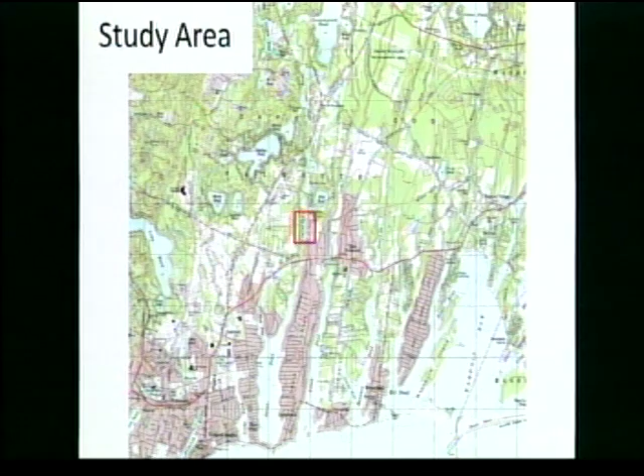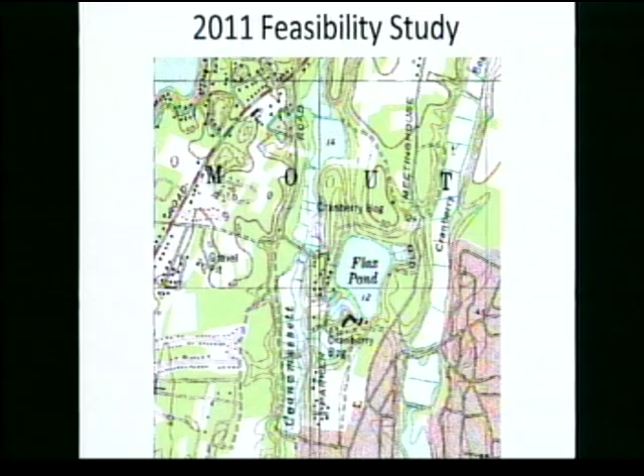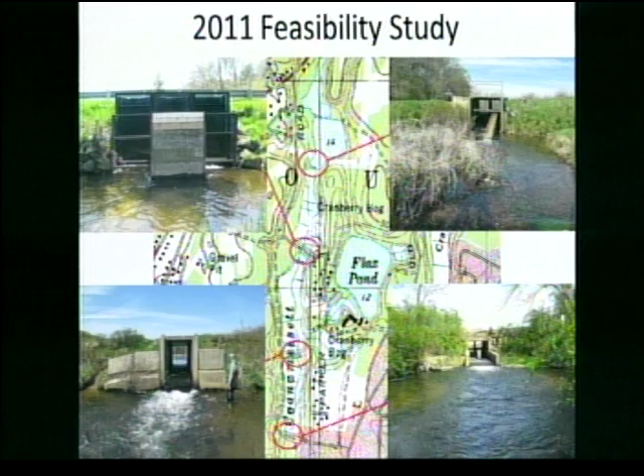In 2011, we worked on a feasibility study for the lower portions of the Coonamessett River, a fish passage feasibility study. This involved looking at four fish passage barriers, including Lower Dam down here, and a berm between Lower Dam and Lower Bog and Middle Bog, the culvert crossings at John Parker Road, and the dam at Pond 14. So we evaluated various options for getting fish around these barriers a little bit better than they're able to get by right now.

Following that study, the town proceeded to look for funding opportunities to further develop designs and, beyond that, construction. That flowed into this contract and project of developing the preliminary designs and final designs later on for the lower bog restoration and lower dam removal.

On this image, folks can see the Coonamessett River flowing downstream, and we've got Lower Dam, which is an earthen dam with granite blocks and some concrete. John Parker Road is along the side here, and this is Middle Bog flowing into Lower Bog.

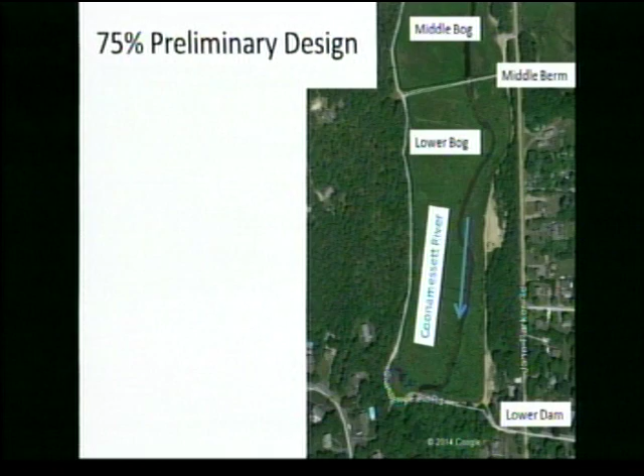The goals of this project were to remove a fish passage barrier, improve both the aquatic and terrestrial habitat on either side of the river, and provide a project that requires minimal long-term maintenance. We want this to be used by the public, maintain the recreational opportunities and the paths around the perimeter, but not require a lot of maintenance to keep up the restoration.

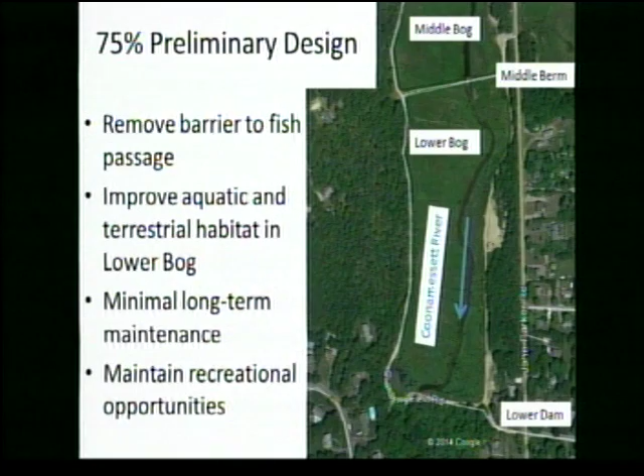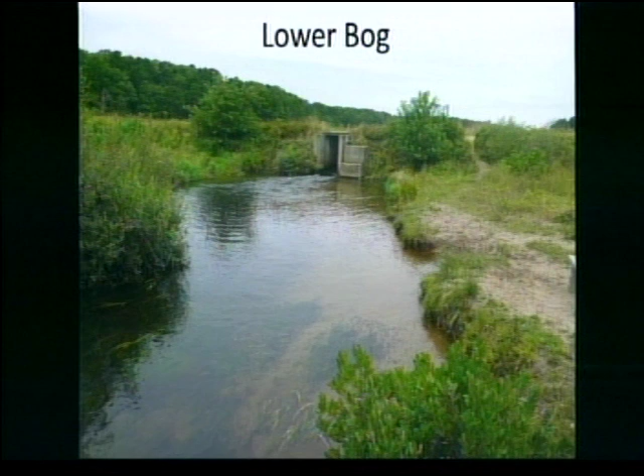As you can see, this bog has not been farmed for a number of years, so there's vegetation growing up naturally out there. I believe there's been some issues with invasive willow plants, so those have been cut back over time as well, and it's still a management concern on the site. There are a number of good native species out there, but also a number of invasive plants.

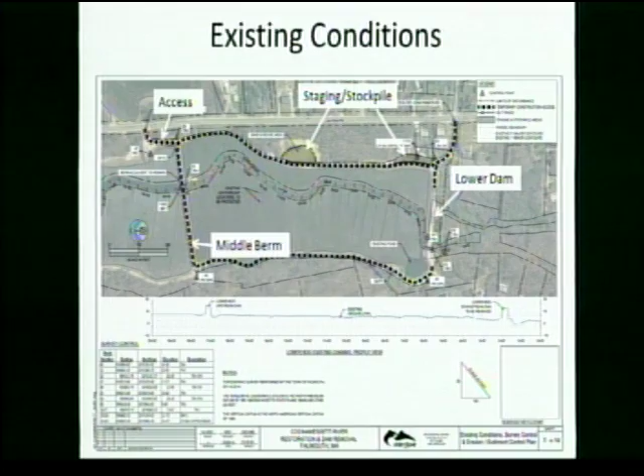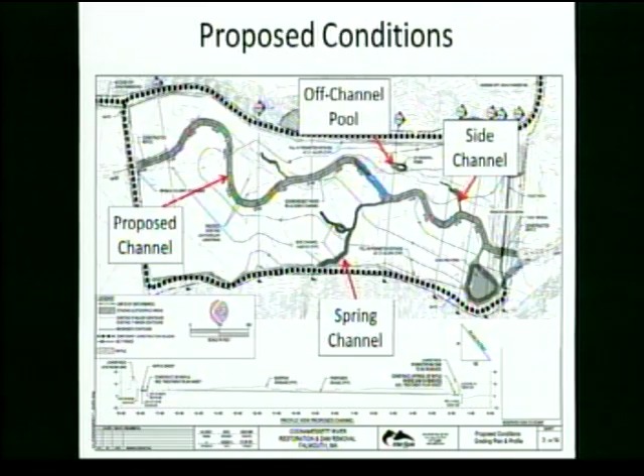The pool, the off-channel pool or open water pool in the southwest corner, will be deepened to try to prevent some of that aquatic vegetation from growing, and to access some of the cold water seeping in from the bottom.

So along these outer bends, each of these outer meander bends will have deeper scour holes created naturally because the wood is there creating turbulence, but also we'll build that in upon initial construction. We've got wood along the outer bends, and we also have wood at the upstream portion of where the existing channel will be cut off. This is important so that water flow doesn't retake the existing channel and basically go back to what it is right now.

There'll be wood placed depending on how much wood we can get, depending on funding. Wood will be placed elsewhere on the floodplains and some of these side channel areas, likely putting some wood in this pool for habitat as well.

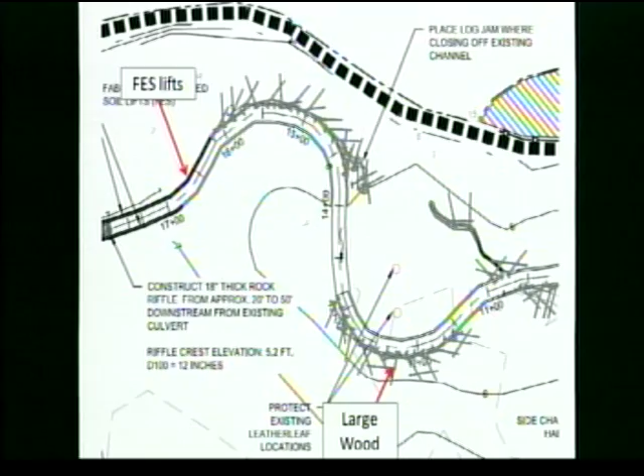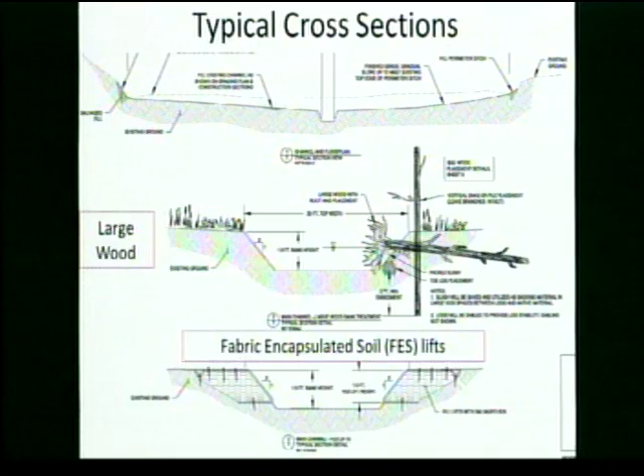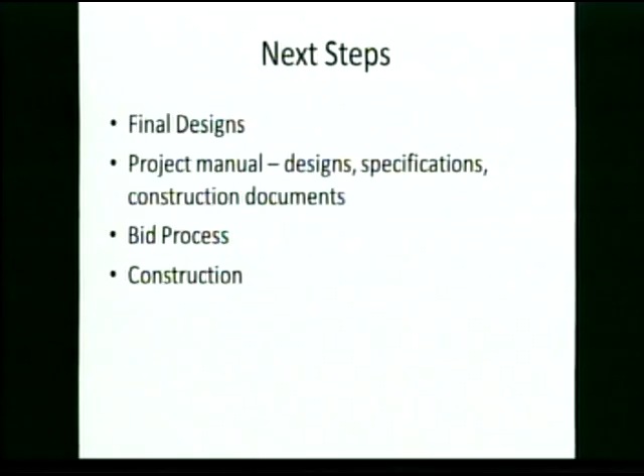Once we get through the permits, we will finalize the design plans, incorporating any comments and feedback received from the regulatory agencies, and develop a project manual for the contractors. This is essentially their contract to go out and build the project, all the technical specifications, the forms to sign, all of that. Then we go through a bid process where we get contractors to bid on the project, have site visits, and select our contractor, and then move into construction.

So it's getting to this stage at the preliminary design level is exciting, but there's still a little ways to go to get to the end here. And I'll take questions. Thank you.

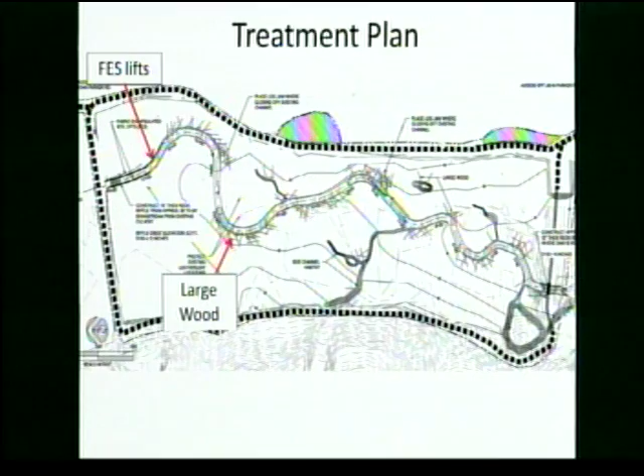It's a good point, though - we'll certainly see fish hanging out at that pool, and we might consider getting a couple of logs in there to provide some cover while they're hanging out. For this project we can't do anything about the system upstream yet, but that's a possibility for the next phase, looking beyond this lower bog. Let's see how this looks and performs, then think about modifying the culvert for easier passage, and depending on how things develop in the middle bog, go from there. But right now we're focusing on this lower bog area.

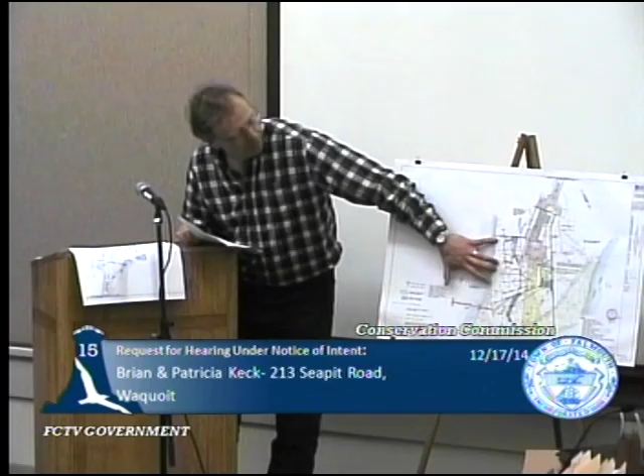And a lot of the Childs River area has a steeper bank down near the water, and then it's flatter than 10%. Then it picks up a little bit again right along the house. So we call this a secondary coastal bank through here.

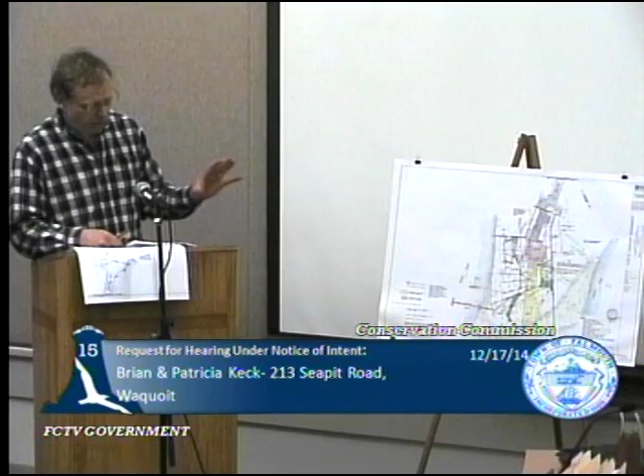This site has a house which was built in 2006 under a Notice of Intent, along with a septic system and the driveway. Those utilities had a fairly tight limit of work surrounding the house when it was put in. There's also a pier which was also built under a separate Notice of Intent, also in 2006.

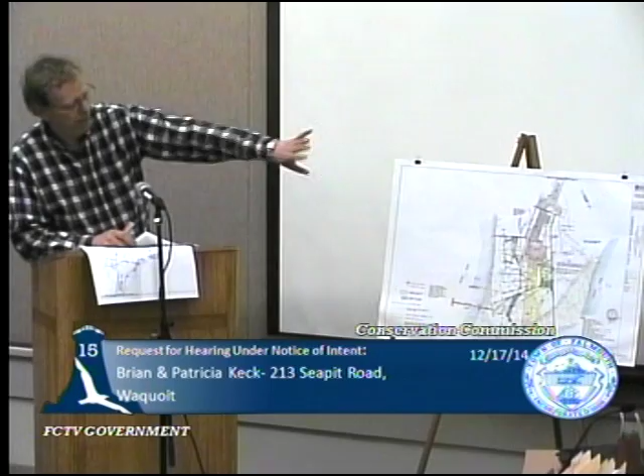Some of the area off to the side, this green area with lawn, is a remnant from when this was all one larger parcel of land which goes with the house up the side there, and that lawn is part of their lawn, which the lot line crosses. There's also an area underneath the trees as you go down that has a mix of native grass.

Amy can explain more what that grass is. Something crinkly, was it? I can't remember. It's a good mix of native plants, actually good huckleberry and things underneath the tree canopy. But there were a few areas that were perhaps mowed by a previous owner.

Those areas, some of them shown in the darker green, will be planted. Amy can explain about the vegetation management, that is removing invasive plants and planting everything that's proposed to be planted as a native plant.

Before Amy gets into that, we'll talk about some of the things I want to do around the house. The first, as in the notice, is installing a natural gas generator up in this area next to the driveway. It's in a landscaped area, in zone B, quite a ways from the top of the coastal bank.

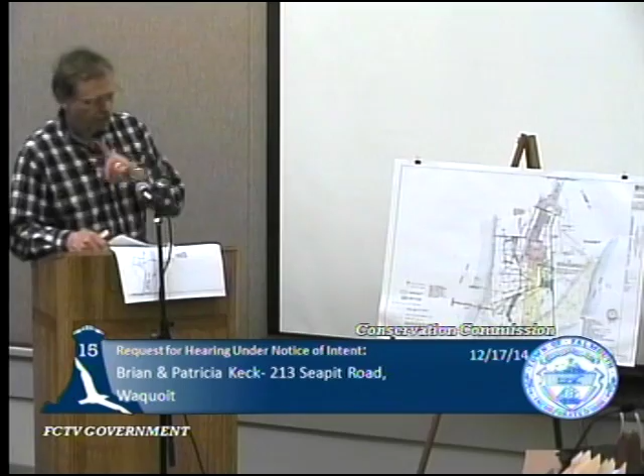So the new surface area, including the boat rack, is about 121 square feet in the A zone and 28 square feet in the B zone, which would require 419 square feet of native shrub planting. I believe this planting right here, 550 square feet, is allocated as the mitigation planting, which is about 25% more than what's required. That's shown in detail on the Blue Flax design plan.

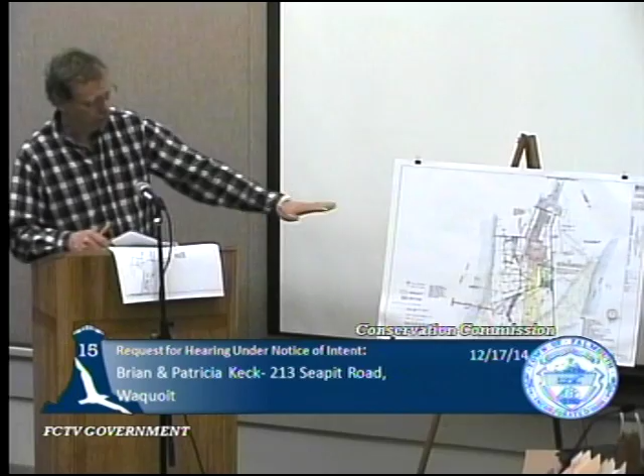Vegetation management - I'll let Amy get into that more, but it'll deal with releasing some of the native plants by taking out the invasive plants, a couple of non-native plants to be removed, trees to be removed, and putting some native ones in their place, but in a different location. And the 25-foot wide Vista corridor, which will be done according to your Vista pruning standards, is pruning - there's some visibility through there now, but pruning branches, no topping. The shrub layer won't be mowed either, because they'll be looking above that shrub layer.

The last thing we'd like to address concerns the order of conditions from when the pier was constructed 6 years ago. A standard condition at that time stated that the permit would be issued for a period of 3 years, at which time the conservation administrator or agent would conduct a site visit to determine if there's adverse impact or alteration to the resource areas on the property.

It's my understanding that this condition was challenged - not on this particular case, but on this condition in a different case - and was remanded. My understanding is that this condition is no longer applied to piers, so we'd like the new order of conditions to state that condition 4 and 32 from the prior order, pertaining to this pier, be removed or stated as no longer applicable.

Generally, I think the improvements - the physical structures we're proposing - are quite innocuous, certainly compared with the amount of planting and vegetation improvement that we're proposing. I'll let Amy go into that; we'll end with the good stuff that Amy can talk about.

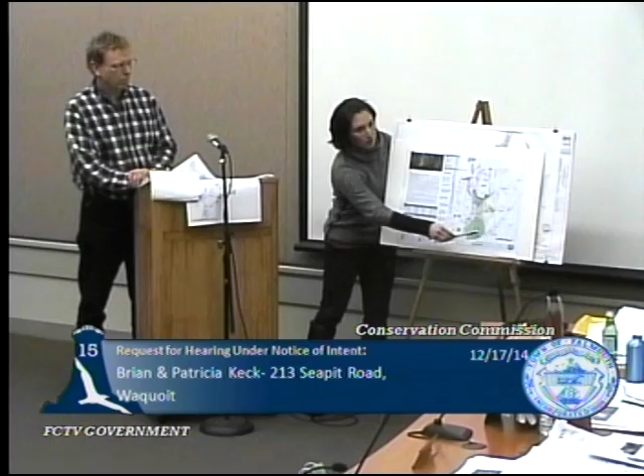Did I answer that question? Yes, you did. Between the plan and the narratives, I got quite confused as to what was being proposed for this whole thing. I think maybe it's because there are so many paths. Well, really the goal of this is to simplify the path system of this property, maintain the useful ones, and restore the ones that are not necessary on the site. Okay, good. It's a wonderful place. It's a nice one. That's all, Irene.

Thank you. Okay, Russ. Tom, can you explain the safety hazard to me? What is the safety hazard? The visibility to the pier? Yeah. It's not a safety hazard. Is it intruders? No, concerned in case somebody falls off the dock. Yeah, so they can keep an eye on activity on the dock.

Okay, so when the new trees grow up a little bit and fill out, you're going to end up with the same issue, aren't you? Less so than with the spruce. You can prune an oak. The spruce is full, like a Christmas tree.

All right, Mike? I believe my fellow commissioners know more than I do, and they did a good job describing it. I'd like to say congratulations to the applicant. That's a beautiful little piece of woods over there, and they're maintaining it.

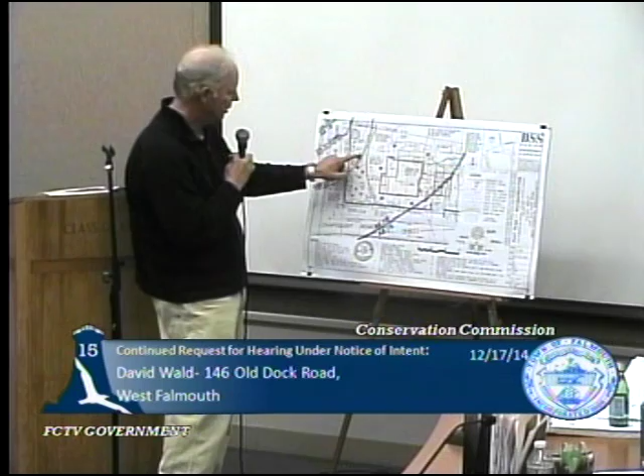So again, I colored them here in green, but there's a note here to plant 30 shrubs for pruning back the invasives. And we've added 2 American hollies for the English holly we plan to cut. Part of that English holly mitigation is the 3 cedars - so there's 5 trees for the 1 12-inch English holly.

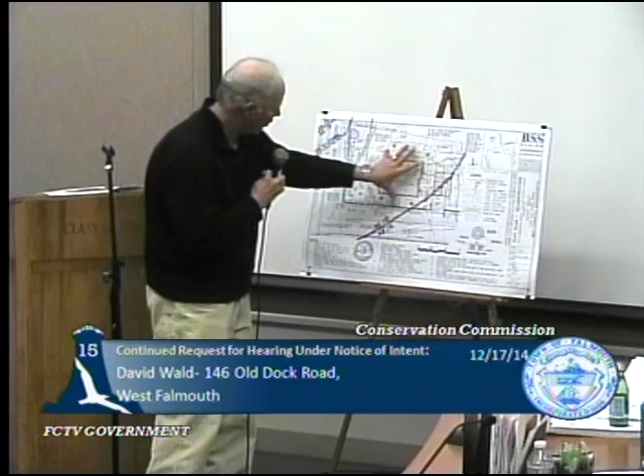So again, septic, house, dry wells, limit of work, and then the mitigation with redoing the stone wall around the perimeter. And you got the wall heights, right, Jeff? There's 10 locations shown, WH with the height. They average out to be about 39 inches of height in the wall. It's pretty tall, right up there.

And you got your letter from Peter. I couldn't get a letter on letterhead, but I got a response from an email. He's allowing us to work on this shoulder here. The wall's all uncovered except for a little bit of dumping that we plan to take away.

And that'll do it. Any questions, Mr. Chairman? Jeff addressed all of the staff's concerns and I believe all of the board's concerns. Thank you, Jen. Is there any discussion on the board? No questions. Thanks, Jeff, for clarifying the wall there. Thank you very much. That made all the difference. I think you were heard. That was awesome.

If there's no need for any further information, I'd entertain a motion. I'll make a motion to close the hearing, take it under advisement. Second. Russell's motion, Mary second. Is there anyone in the audience who would like to comment on this project? Seeing none, call for the vote. All in favor? Aye. Opposed? Any abstention? Unanimous, so moved.